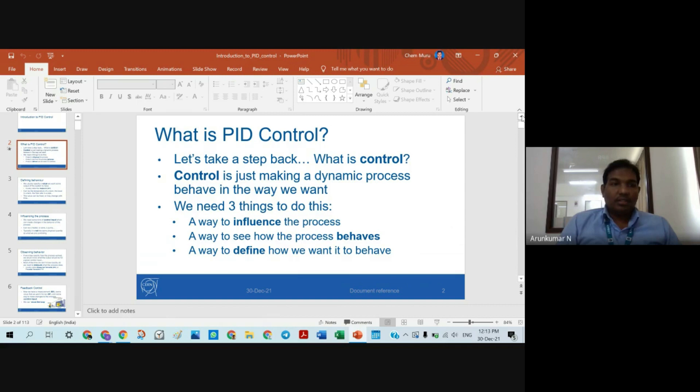So we usually specify a value we want some output of the system to have, and that is called the set point. That is your desired value, whatever value you want to maintain. If I want to maintain the process in such a way that we get a desired value, that is called the set point.

For example, I want to maintain the temperature of the room at 18 degrees centigrade. So I just set the temperature to maintain 18 degrees using the AC remote. We have an air conditioner, so we set the value as 18 degree, and the air conditioner will control the room temperature by maintaining it at the set point. Any changes in the room temperature will automatically be controlled, bringing it back to the set point temperature.

Similarly, for the level system we discussed yesterday, the tank level controller system - if you want to maintain the height of the tank, the flow will adjust in such a way that it always maintains that level. So the value can be fixed or may change with time. This is what dynamic means.

The pump cannot discharge a constant flow always. It depends on the conditions, and it can vary depending on many factors like the friction factor and the velocity difference. So you cannot expect a pump to deliver the flow at a constant rate, it depends on several factors.

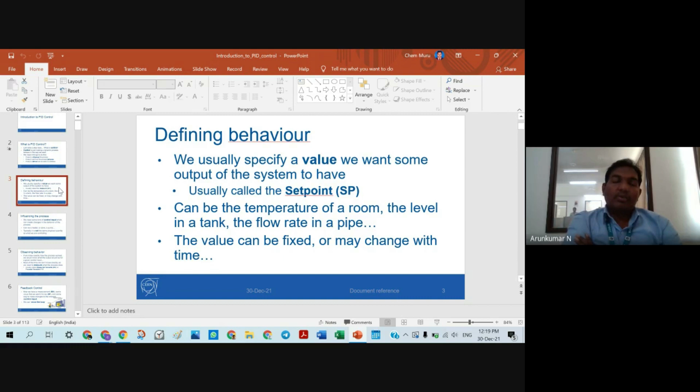In the same way, other parameters may also change in the process. So all the processes are not steady state, it is dynamic in nature. That's why we need a control system.

So how do we influence the process? We need some kind of control input, right? We need some input, and we can create some changes in the behavior of the process. For example, how do I control the boiling of a liquid by supplying more amount of heat?

In our home, we used to heat milk, right? So we adjust the knob of the gas stove to increase or decrease the flame, depending upon the boiling condition of the milk. When the milk boils, we usually reduce the flame. By intuition we know that the milk is going to boil and we have to reduce the heat. In such a way, the control input is given.

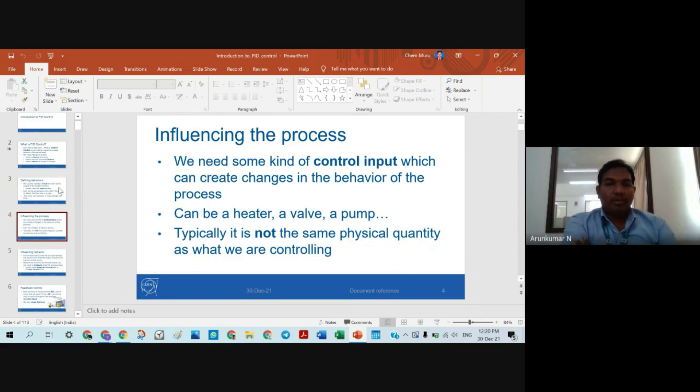So we need to create changes in the behavior of the process. It can be a heater, a valve, or a pump. This is the way we influence the process. So how do we observe the behavior?

If we knew how the process works, We would also know what the output would be for a given control input. I'll give the same example again.

If you have any questions, if you want to interrupt at any time, you can ask me.

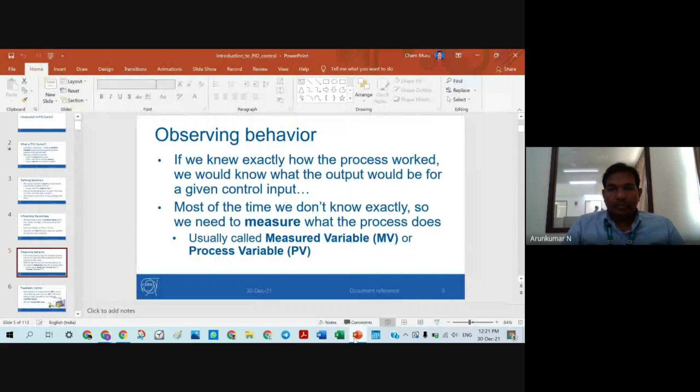The process can be any process, right? A heating process. And we heat by using some flue gas, some gases, right?

You can consider the same example. Here you assume this operator as a controller. The operator monitors the temperature in the gauge, and using his hand, he adjusts the valve so that the flow of gas is controlled. So what the operator is doing is, if the temperature is set at some value, he knows that value has to be maintained, so he will act according to the changes in temperature and adjust the valve.

In the same way, the controller has to take action in such a way that it is maintained at the set point. The set point is our desired value. So my intention is to maintain the temperature at 50 degrees centigrade, so I'm setting the value at 50 degrees centigrade. But the measured value says it is at 55 degrees centigrade, so it means there is some error.

There is some 5 degrees error because it is higher than the set point value. The excess amount of heat was supplied, and because of that, the measured value has exceeded the set point value. It has to be detected by the controller, and that error has to be compensated. That 5 degrees of heat has to be compensated.

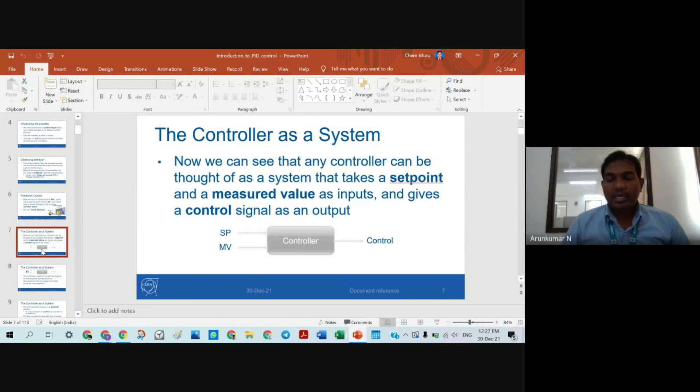So the controller has to give a signal in such a way that the final control element, which can be a valve or a transformer in case of electrical systems, is adjusted and the temperature is maintained. So for a controller, the input signals are your set point and measured value, whereas your output is your control signal. Output from the controller is your control signal.

Continuing that, the controller needs to convert two signals of one physical quantity into one signal of other. Let's say temperature is your set point. This has to be converted into another signal. The controller has to convert that physical quantity as a signal, and based on that signal, the final control element is adjusted. In this case, it is a valve.

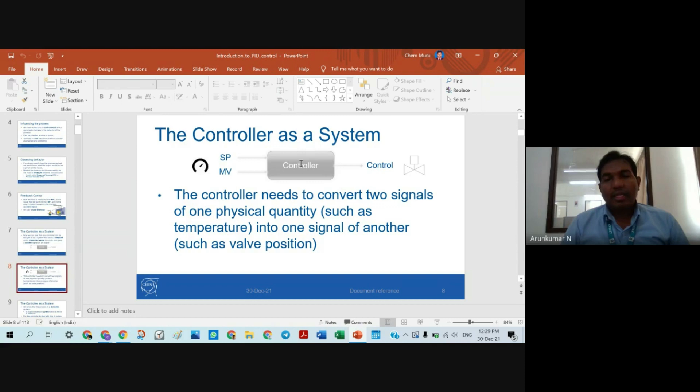So here set point is your temperature, that is your physical quantity. If the controller receives the signal, it converts the signal into another form, and it has to be given to the final control element.

So we know that the process is a dynamic system. Its output depends on current inputs as well as its past state. For the controller to deal with this, it makes sense that it should be a dynamic system too. If it is a dynamic system, then controller action is required. Usually, a steady state system does not require a controller.

Outputs depend on current inputs as well as its past state. It means that error is also a function of time. Error is also a function of time. What is error? Error is nothing but the difference of your set point and measured value.

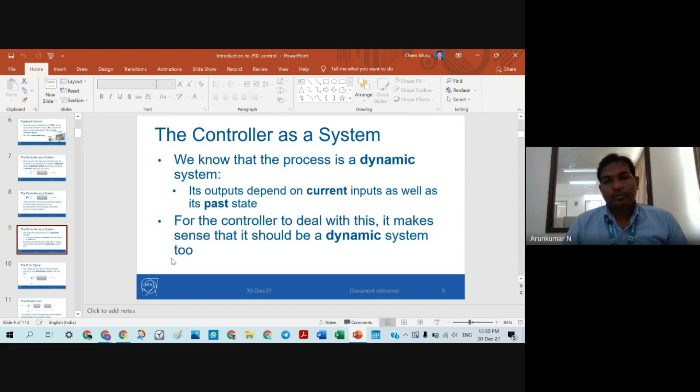And it can change with respect to time. Error cannot be a constant function. If it is a constant function, if the error is zero, then the controller output will be zero. The controller will not take any action unless the error is non-zero.

So for the controller to deal with this, it makes sense that it should be a dynamic system for the controller to act. As I said, very often we can think of a controller acting on the difference between set point and measured value. This is your controller, and set point is one input already given to the controller, and we have another input, that is your measured value, and this comparator will compare both the values.

This set point and measured value. Suppose here set point is 50 degrees centigrade and your measured value is 40 degrees centigrade. This comparator will compare both the values. 50 minus 40 will give you some error, 10 degrees centigrade. This 10 degrees centigrade is sent to the controller, and this controller, based on the error, will give some output signal.

This controller will actually control the system. It produces some output signal, and based on the output signal, the final control element can be adjusted. The final control element is nothing but one which executes the plan. If a controller gives some plan, the final control element will execute it. If I want to adjust the valve to some position, the controller will give the signal in such a way that the control valve is adjusted.

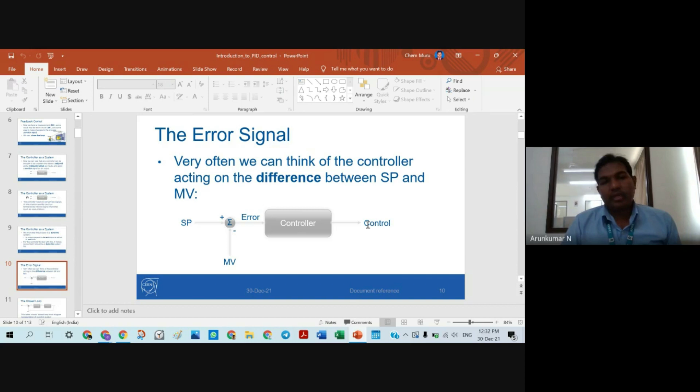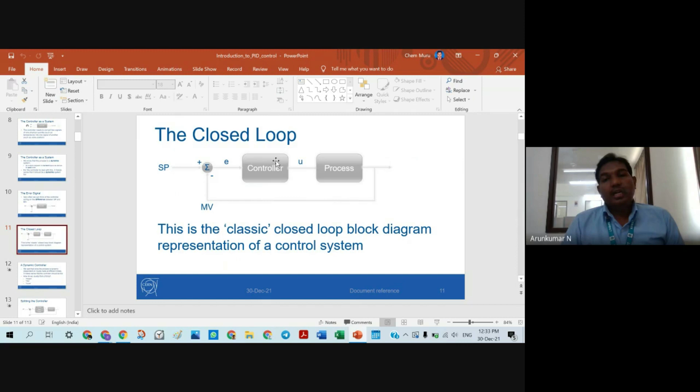Okay, and it has to be a closed loop. This is your actual process, and from the process you measure the value and give it to the comparator. The comparator will compare the set point and produce some error, and this error is the input to the controller. The controller will produce some signal, that is u, your controller output, and it goes to the process. So this is what we have seen yesterday, the feedback loop.

We have process, measuring element, controller, and final control element. These are the four major parts of a control system.

So what is this dynamic controller? The controller cannot be ideal. That means a controller cannot take action based on a single piece of information. If it takes action based only on a present situation, then we cannot predict what happens in the future.

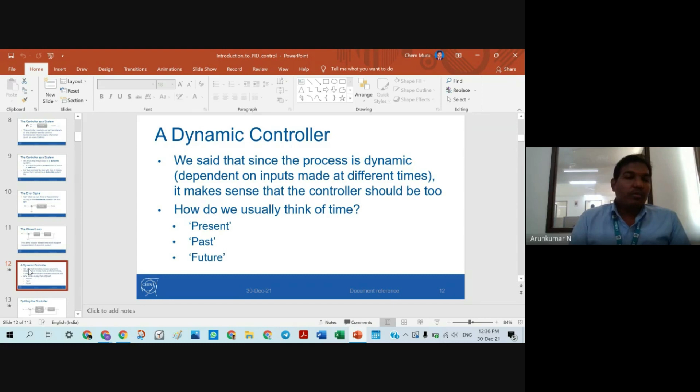A combination of these three actions is required in order to achieve control, and the control has to be quick and accurate. So we can split the controller into three parts: present, past, and future. So three modes are present in a PID controller: proportional, integral, and derivative. These are three individual modes of control.

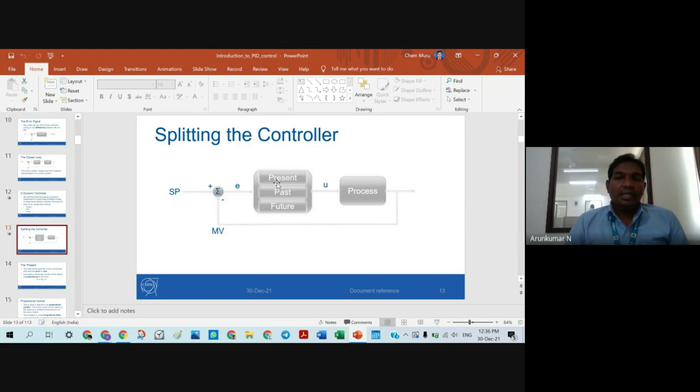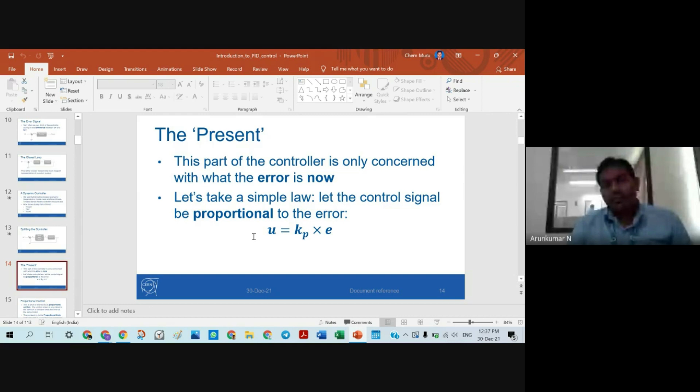So proportional action, integral action, and derivative action. What is proportional, what is integral, and what is derivative? We will see individually. So this part of a controller is only concerned with what the error is, what is the present error at that time. And the control signal will be proportional to that error. Let U be the control signal. U will be based on the error, that is, proportional to the error.

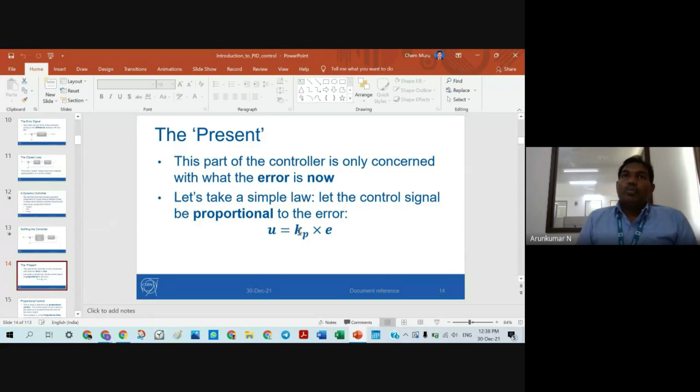Here you can see U is proportional to error. If you introduce a proportionality constant, you get Kp, that is your gain, proportional gain. So your U will be a value which is equal to Kp into E. E is nothing but error, and Kp is nothing but your proportional gain. So a proportional controller is something which produces a signal that is proportional to that error.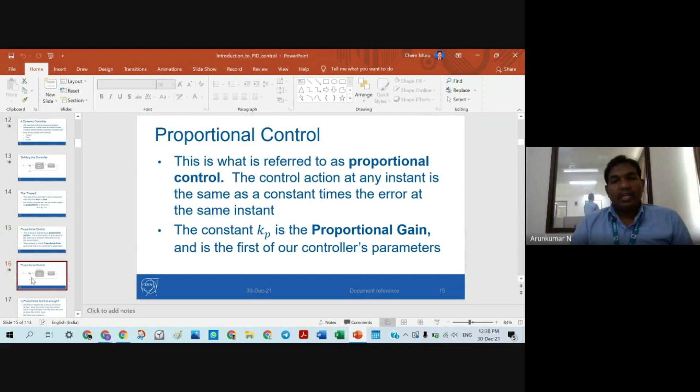So how does it actually look? The control action at any instant is the same as a constant times the error at that same instant. For example, the present is your proportional controller, because the proportional controller will take action at that particular time for a particular error value at the present time. So here, the present value is replaced with the proportional controller. How does your proportional controller work? It actually produces a signal which is proportional to the error. Kp into E is your output signal for a proportional controller.

You can think of it like this: if a reactor is maintained at 50 degrees centigrade, you are maintaining that temperature by using electrical heating or something like that. If I'm setting the value at 50 degrees centigrade, the controller will check whether the reactor temperature is maintained at that value. If the reactor temperature decreases, what happens? This controller will produce some signal, and based on that signal, the final control element will adjust it, either increasing or decreasing the flow of the gas, or adjusting the transformer.

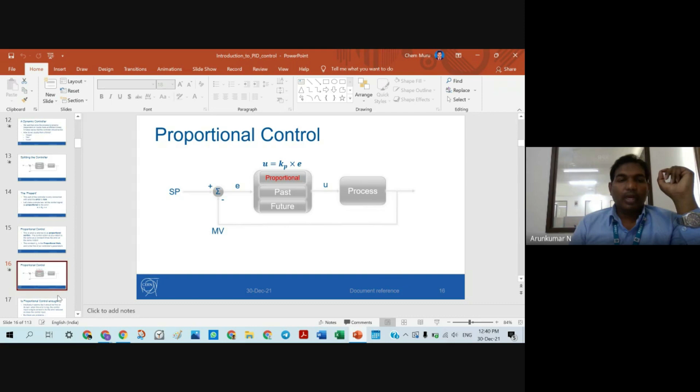Intuitively, it seems like it should be fine on its own. But when the error is big, the control input is also big. As the error is reduced, the control input is also reduced.

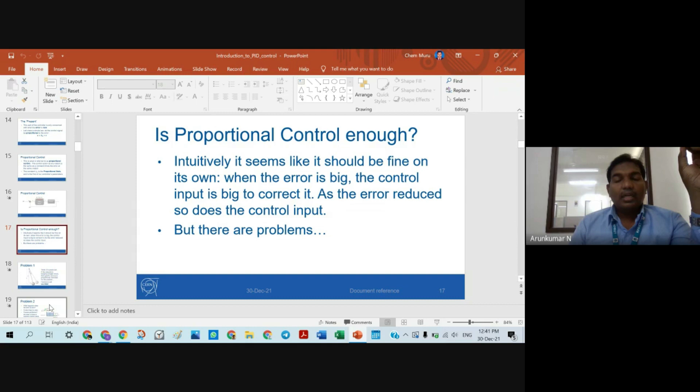So a proportional control will take action proportional to that error. If the error is big, then the control output is also big. If the error is small, the control action is also small. It just actually controls proportional to the error.

But there are some problems associated with that. We'll see what happens. Here you can consider an example.

In the inlet, you have a control valve, and in the outlet, you do not have a control valve. I want to maintain the height of the tank. If I want to maintain the height at the same position, I cannot change the output flow rate. The output flow rate has to be constant. If I change the output flow rate, then height will automatically change.

If I want to maintain the height of the tank, then there must be some control action in such a way that it always maintains the same height.

The problem with the proportional controller is it produces a steady state error. What is steady state error? Steady state itself is not changing. Then it combines with another term called error, steady state error. So error is constant. Using proportional controller, we arrive with a steady state error in some places.

For example, if the level of the liquid is maintained at 5 meters, maintaining the level at 4.5 meters is not a big problem, but in very complex systems, even a slight variation in the properties may result in spoiling the quality of the product. So we cannot encourage that. In such systems, we need accurate control.

So the proportional controller usually produces an offset. What is the difference between offset and error? Error is nothing but the difference between set point and measured value, whereas your offset is nothing but the difference between original steady state and a new steady state.

So with a proportional controller, we always have offset, or let us call it steady state error. So the proportional controller will have an offset. Proportional, using only proportional action, will have a steady state error.

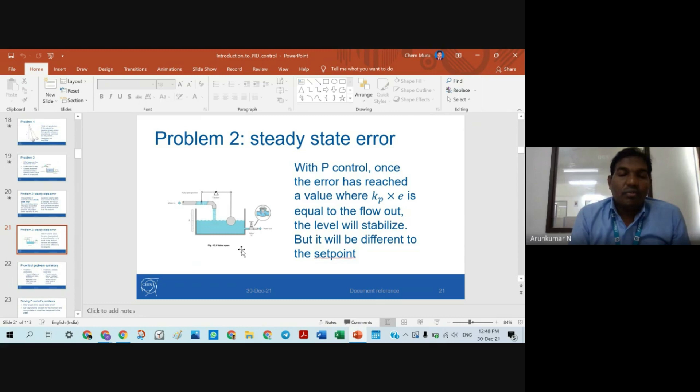I want to maintain this level, but increasing the flow rate has reduced the level of the tank. Then what I have to do is maintain a constant flow in. If there is a varying flow rate, then definitely the height will vary.

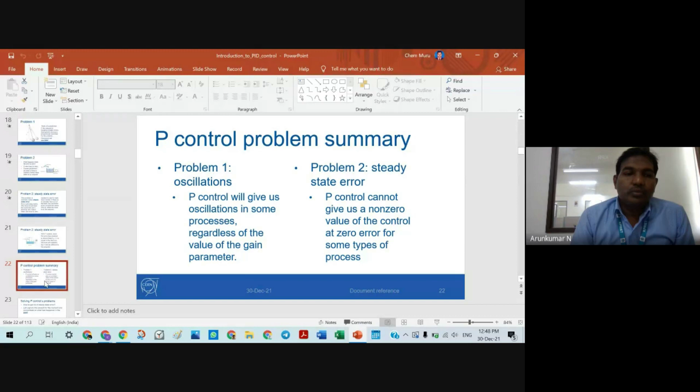This will lead to some offset position that is called steady state error. So we can summarize that proportional control cannot give a non-zero value of the control at zero error for some types of processes. So how can we avoid this? Solving this proportional control problem, how can we get rid of the steady state error?

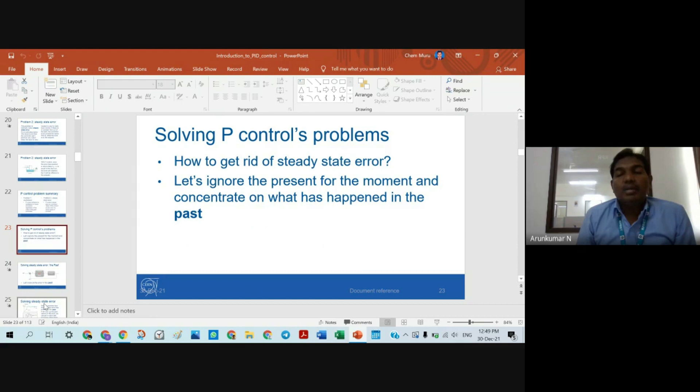Now what we have to do is ignore the present for the moment and concentrate on what has happened in the past. We have to look at the past values of the control system, because the proportional controller only takes the present values. The past values have to be taken into account.

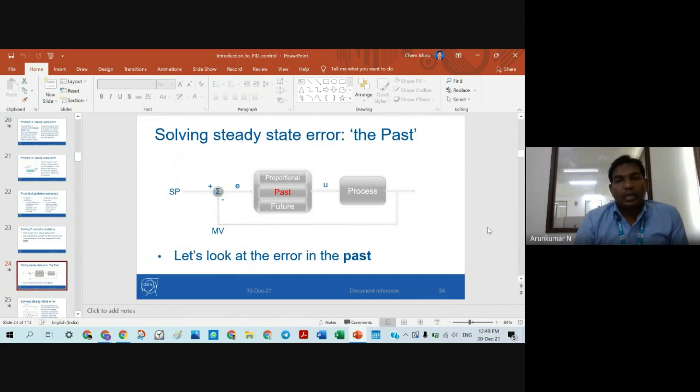So now we have to add one more action, that is your integral control. Right now we have the controller only with proportional control. Now we are going to add one more action to it, that is your integral action, which actually collects the past values. So how does it do this?

Let's say we can examine how the controller error has evolved in the past. If we sum up the past values of the error, we can get a value that increases when there is a constant error. Integration is nothing but adding, a summation of the values.

That's why what the integral action will do is sum up the past values of the error, and we can get a value that increases when there is a constant error.

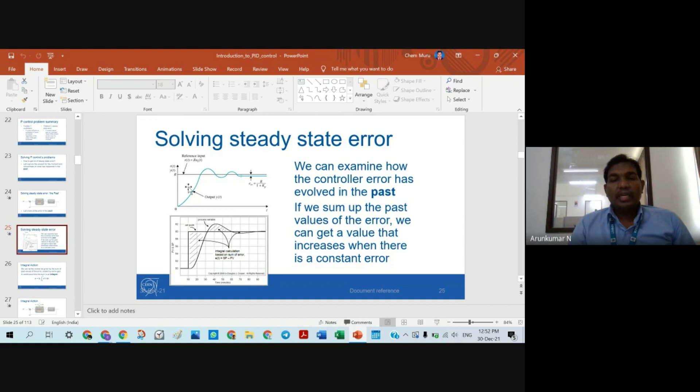So how does the integral action work? We can let the control be given by the sum of the past values of the error scaled by some gain. In proportional control, the output u is equal to Kp into e, that is your error signal, your control signal will be proportional to the error value. But here, your error value is integrated over the time 0 to t.

So over a period of time, your error value is integrated and then multiplied with some constant value Ki. There it is your proportional gain, and here it is your integral value. Kp is your proportional gain, and here Ki refers to the integral gain, the integral constant.

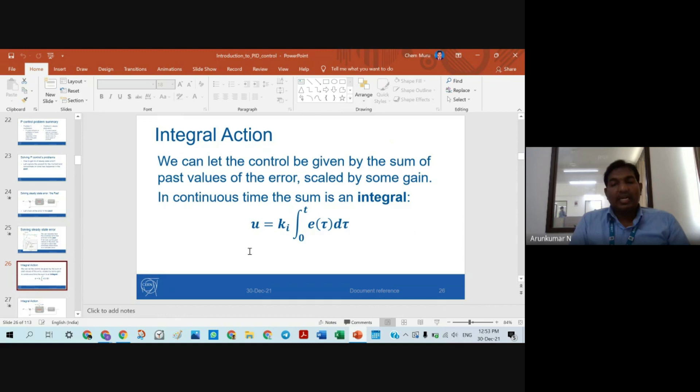There you have only one parameter, that is Kp, but here there is another value called Ki that is added. What this integral action does is integrate the past values of the error and give output signals. We'll also have another condition: we have an integral gain Ki which converts an integrated error to a control signal. We would actually like to parameterize this as a time, as in how fast we can remove a steady state error. Now this integral action will remove the offset.

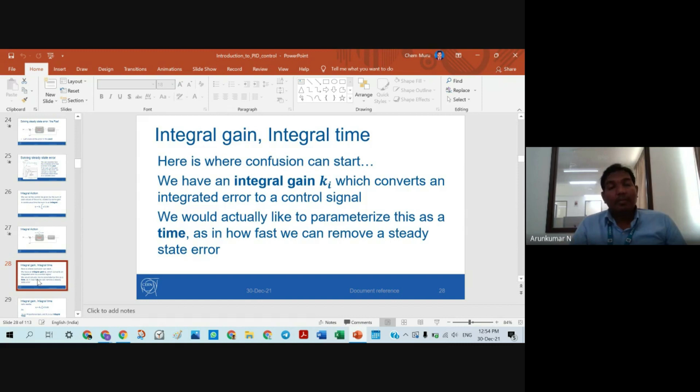How fast can it do that? It is a big question, because it actually takes the past values, integrates, and gives the control signal. How fast the control action will be implemented is another question, so future values have to be taken into account.

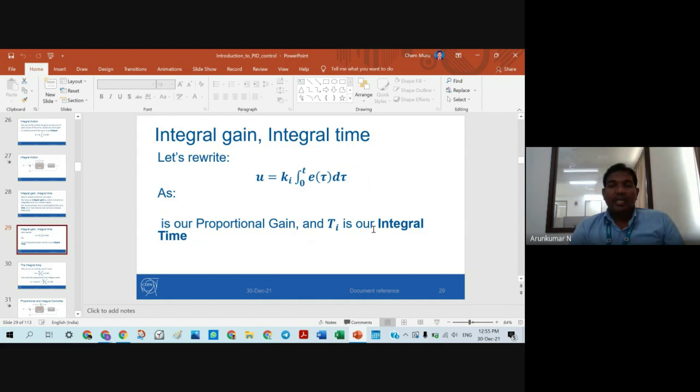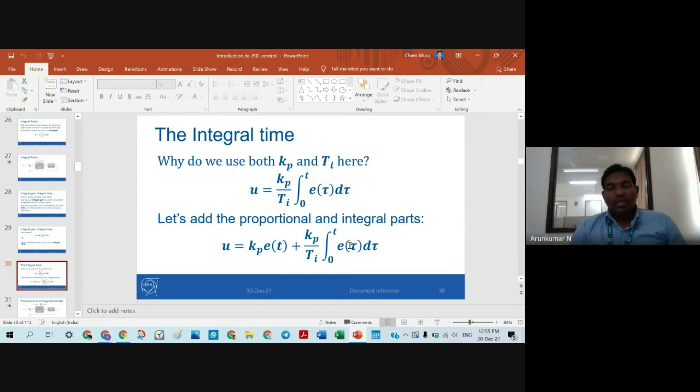Let's rewrite this as u equals ki times the integral from 0 to t of e(tau) d tau. This is our proportional gain, and ti is your integral time. When you add this proportional controller and integral controller, you get u equals kp times e(t) plus kp by Ti times the integral from 0 to t of e(tau) d tau. This is your integral and proportional action combined.

Now we have another problem: how fast or how quickly the steady state error is removed. We solve the steady state error by adding an integral action, that is, by summing the past values. But how can we solve the oscillation problem?

It produces more oscillation. When integral action is used, it produces more oscillation. So how do we reduce that oscillation? How do we predict the future of the error?

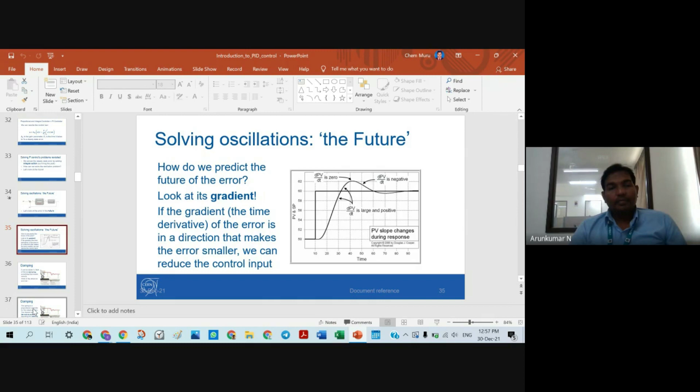For example, you can think of this as damping, something that resists velocity. Think of the wheel on your car. When you travel in a car, this damping will reduce the velocity of the car, like the suspension. So this will be a hindrance to the speed.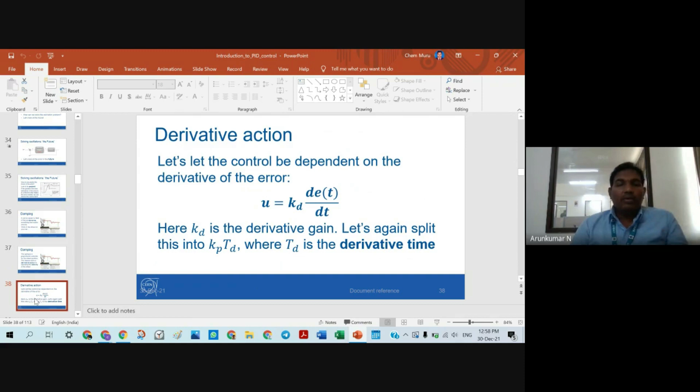Again, we have to look at what this derivative action is. It will predict the future values, and it will give the controller output according to it.

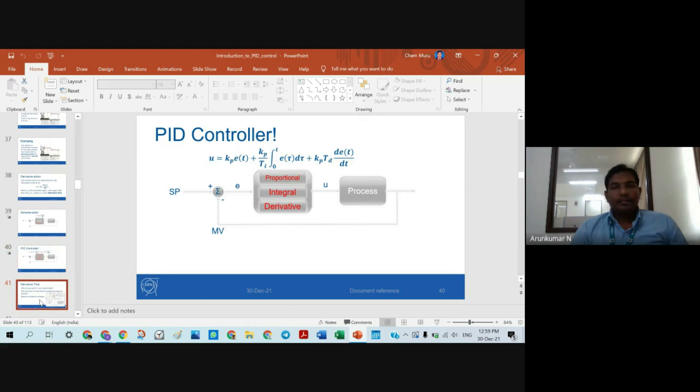So this is your proportional part, this is your integral part, and this is your derivative part. When these three actions are combined, the process becomes complex, and we have three tuning parameters: Kp, tau I, and tau d - the integral time and derivative time parameters. However, the process control will be quick and accurate.

It also depends on the situation where we have to use integral action and where we have to use derivative action, or we can use the proportional alone, or combine it with integral or derivative action. It depends on the situation and the type of application, the type of process we use. By experience, we will decide.

Some of the problems associated with this derivative action: we know that derivative is differentiation. Integration, now it is differentiation. What differentiation does is it amplifies the changes, and we can also get problems if the measured variable is noisy.

One example I can give you: if you want to measure the level of petrol inside the petrol tank, you place a level sensor inside. But the situation is the petrol level keeps fluctuating - it produces noise to the sensor because we are riding the bike, and the level of petrol keeps changing and fluctuating, producing noise to the sensor. It cannot give you an accurate value.

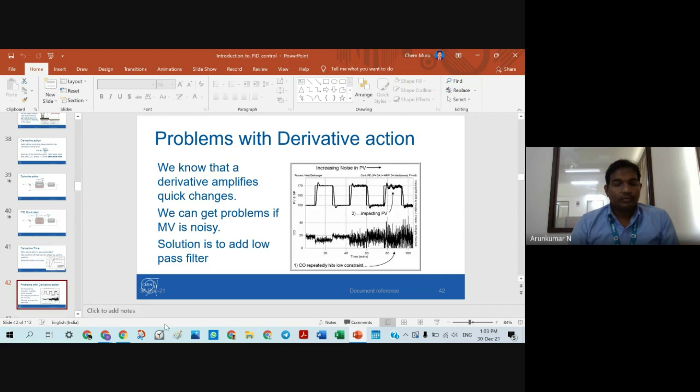So we have derivative with filter. To reduce the noises, we allow this.

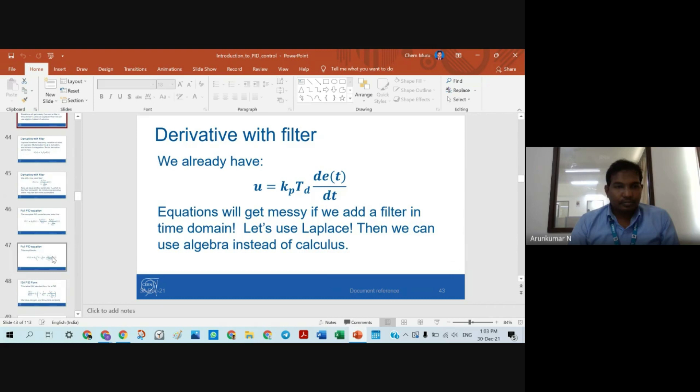Then we have added the integral part. The integral part actually sums up the past values of the error. Integral action eliminates the offset, but it produces oscillations, so that is the drawback of this integral action.

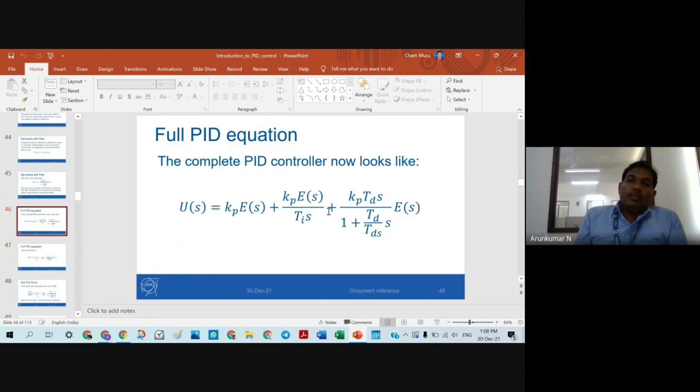So this is the controller part. If you have any doubts on this, you can ask.

Also, stability is one topic where you have to concentrate. We have discussed the main topics in the control system, but due to the restriction of time, I will give you some topics to concentrate on for your GATE exams. You have to look for stability, Bode plot, and how to find the stability of the system. There are several tools used to find the stability of the system: one is the Nyquist plot, and another one is the Bode plot. These are some of the methods, along with the Routh criterion, to find the stability of the system.